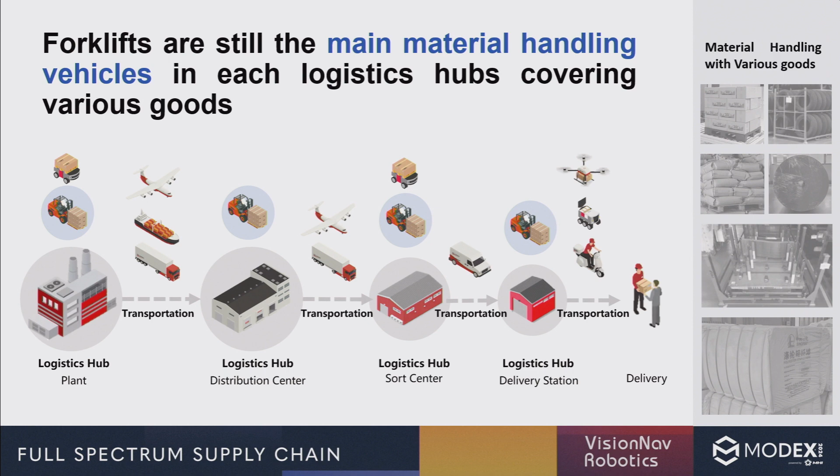But we're slowly realizing that's not the most efficient way to do such. So by show of hands, who's in this room right now because of labor shortages? What about maybe product damage? Safety? Okay, so there's a lot of different variables to start looking into outside of just the traditional reduction of pallet movements within the four walls of your facility, whether it's distribution, manufacturing, logistics, et cetera.

And slowly over time, we are all realizing now, if you look around this expo, for example, years ago you rarely saw a robot. Now it's like everywhere you go, you see automation here, robotics here. And that slowly has been happening over the course of the last 10 years or so at a much more rapid pace. There's always been traditional automation and AGV, especially in manufacturing, automotive facilities, but it's been gradually increasing over time.

Through several mediums, because of labor shortages or trying to be more competitive in your application or finding a better way. But we predict here at VisionNav Robotics that within the next 20 years or so it's going to be almost a third of global annual sales of material handling solutions. Right now in 2023, AGVs are only roughly 1% of the global forklift market, but we're predicting by 2028, almost 20% or more.

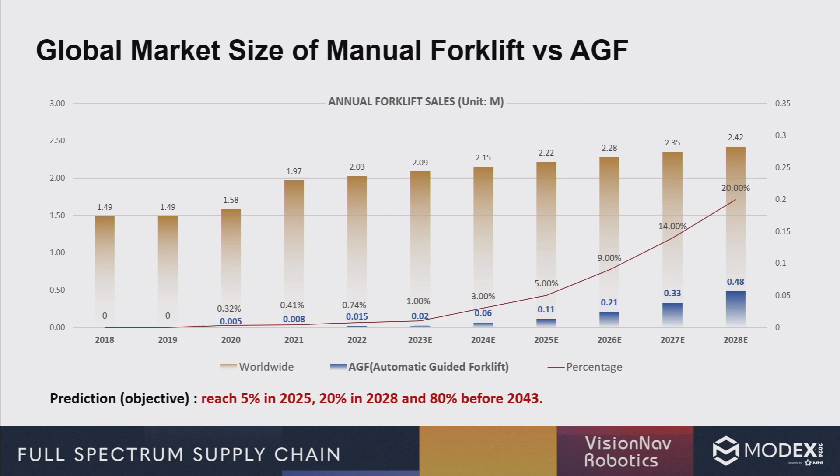And that's the reason why you guys are here right now. You're already thinking, what's next here in this space. And that's really to start automating your fleet and thinking about ways to maximize efficiency within the four walls of your facility.

So key components of AGVs - they are chassis forklifts. Almost every manufacturer here in the show uses a chassis forklift. It looks very similar to the forklifts you have here in your facility, but there's several different components of the unit. Most of the time they're off-the-shelf components: SICK safety sensors, 2D LiDARs, 3D LiDARs through RoboSense or Ouster. They're all off-the-shelf components and different controllers that drive the vehicle.

Starting off with positioning, a lot of questions come about how do AGVs work? How does it get from point A to point B? Most organizations are using - does anyone know what LiDAR is? Light detection and ranging, or the SLAM algorithm that controls the perception. So 3D laser LiDAR, maybe different image cameras or inertial controllers for steering and driving encoders - different components to help navigate in the real world once it's deployed.

So that's from a positioning standpoint. And then you have the controller that actually drives the drive motor, the lifting motor, the steering encoders on the vehicle. Again, off-the-shelf components that anyone can outsource and utilize.

And then you have the perception. Here at VisionNav Robotics, we use a higher level of perception. So we do trailer loading, high bay put away using 3D LiDAR perception and machine learning algorithms to perceive different payloads and racks. That's another outlook to utilize on a traditional AGV forklift. And then safety - everyone has a safety director that's always constantly saying, I don't think we can automate this yet because how safe is it.

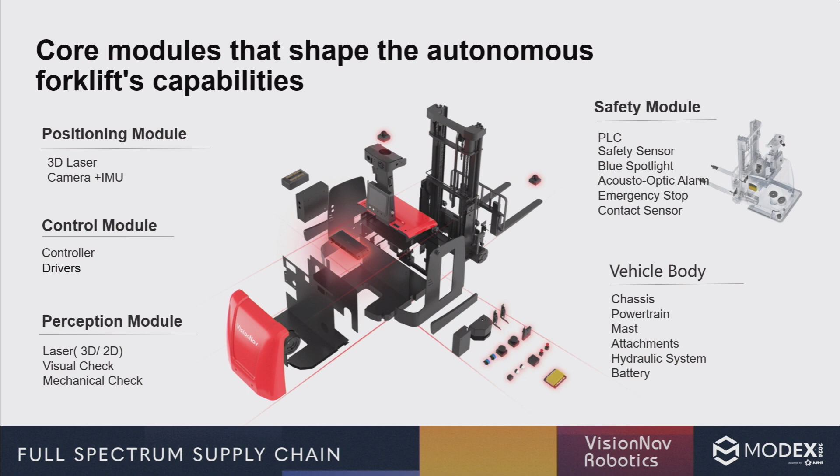A lot of them are using different safety features like PLCs through SICK that are PLD or PLE safety rated, 2D plane LiDAR, 360 coverage around the vehicle. You want to make sure your provider is utilizing ANSI B56.5 as a safety standard here in North America, or if there's a global expansion, ISO standards and CE standards. You want to make sure all those components have some type of safety logic and standards associated to the devices. Again, off-the-shelf devices that many players here at this expo today use.

And then obviously earlier I talked about the chassis itself. Most are just standard forklift chassis, retrofitted essentially to make it autonomous. Now, given a lot of organizations utilize their own proprietary software to drive the vehicle, that's where some organizations will start separating themselves as far as perception and doing really complex scenarios within the four walls of your facility.

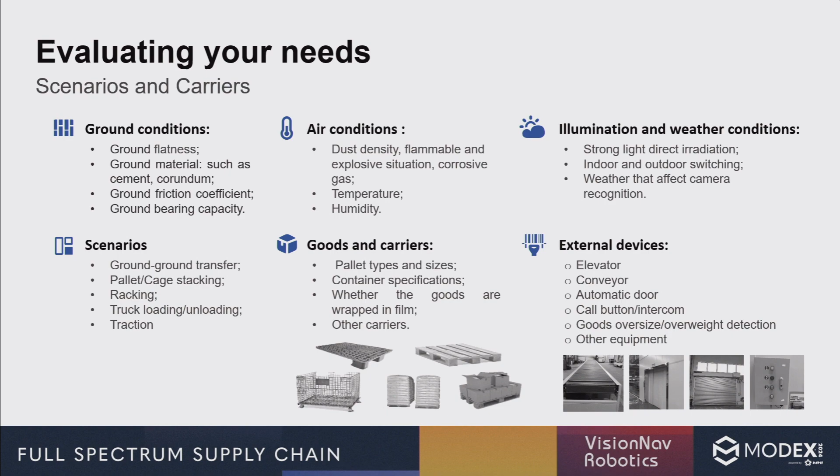So how do you look into automation? How do you evaluate your application? So do we have any 3PLs in here? How about some general manufacturing? And hopefully no foundries. Any foundries in here, or like concrete factories or anything like that? No? Okay, so those three applications are extremely different.

3PLs are mostly clean. There might be some pallet boards and some shrink and stretch wrap on the ground. Manufacturing could be dusty, a little bit of grime here and there. And then foundry is just, that's a different world.

So how do you evaluate the application? Perception and navigation is extremely important to the environment that the AGV system is in. You want to understand the ground flatness. You want to look into the environment, humidity, temperatures also will affect perception and navigation.

No different than everyone wearing glasses right now like I am. If I get a lot of dust and debris on there, I'm going to wipe them off. So understanding the environment that the AGV is going to be implemented into, and the lighting and things of that nature, is extremely important, and that's something you should focus on as well for higher accuracy.

Of picking and transportation. And lastly, when it comes to AGVs in your facility, integrating into infrastructure - you guys may use conveyor systems, ASRSs, machine PLC logic. Hopefully the majority of AGV providers have the ability to integrate to your facility infrastructure using those type of logics.

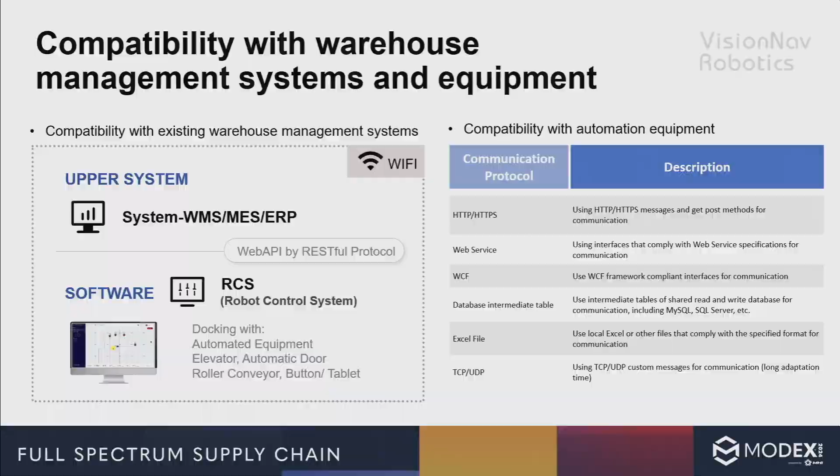Now, if you're in more of a 3PL, maybe a warehousing atmosphere, you need some inventory tracking. So does AGVs tie up to your upper system? Yes, they do. They have the ability to tie into your WMS, whether it's a homegrown system or maybe a SAP, Manhattan, Blue Yonder. Majority of organizations have Wi-Fi connectivity, open API, Modbus protocol, for example, to tie up and message into your inventory for tracking as well. Even barcode scanning.

So if you guys have barcode scanning logic that's manually triggered at the QC area, that's another opportunity to utilize AGVs for triggering and mission demand. And then how that works is, your WMS is the upper system, the brain, so to speak. The AGV provider's fleet management system - here at VisionNav, we call it the RCS, Robot Control System - that's our mid-level system that controls the activities inputted from your upper system. It translates down through the body of the AGVs, telling the AGV to go to X location to pick, or stage a pallet at dock door 4, for example.

Service and support, it's extremely important too as well. What happens after the company sells you a product or a solution? You don't want them to just walk away and say, hey, good luck, Mr. Customer, I'll see you in 5 or 6 years. That's not good practice at all.

So you want to make sure the organization has a good structure of support, of integrators, general manuals, integration protocol, project engineers and deployment team members to help assist and walk you through that go live date. And then most importantly, supporting you after the go live date - whether it's 2 weeks, 30, 60 days on site, and then continuously meeting with you on a bi-weekly, monthly practice for KPIs, continuous training, and things of that nature.

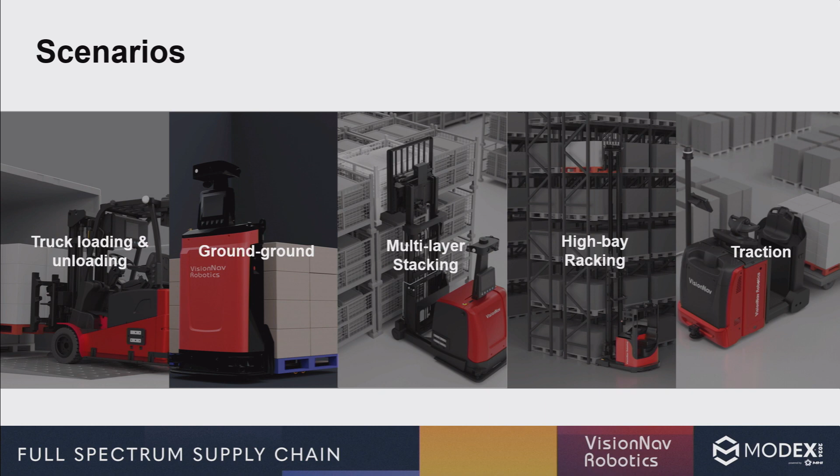Some scenarios we utilize right now are trailer loading and unloading, ground to ground, high bay put away, stacking and destacking especially in bulk, so 3PLs or warehousing up to 3 or 4 pallets high potentially, and then traction, which is tugger, long milk runs, plant to warehouse, those type of scenarios.

So here I'm just going to dive into some of our projects that we deployed over the last several years, and maybe it'll get some of your brains going regarding what's out there and opportunity.

The sound's off, but this is an opportunity we deployed about 2 years ago with Coupang. If you guys know who Coupang is, they're in South Korea, they're like the Amazon over in Korea. We deployed 56 of our units in their one facility, doing ground-to-ground A to B movements across conveyance and elevators.

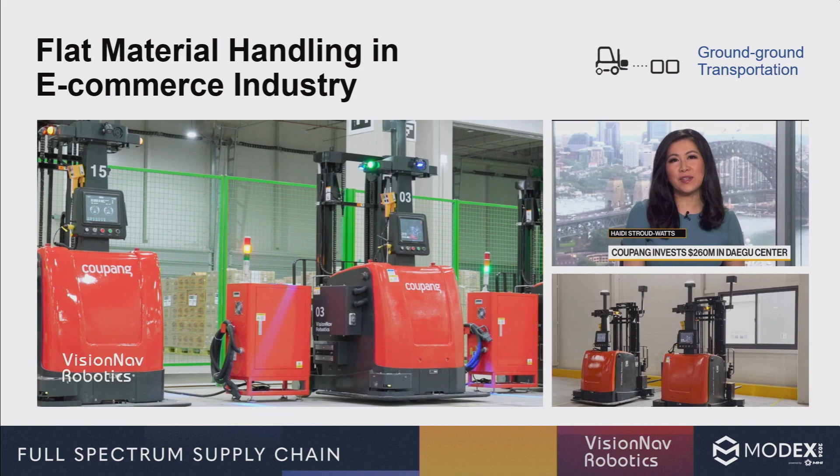Bloomberg actually did a really great interview on this project for us last year, so that was a really good opportunity for exposure. So again, the e-commerce, the 3PLs, right?

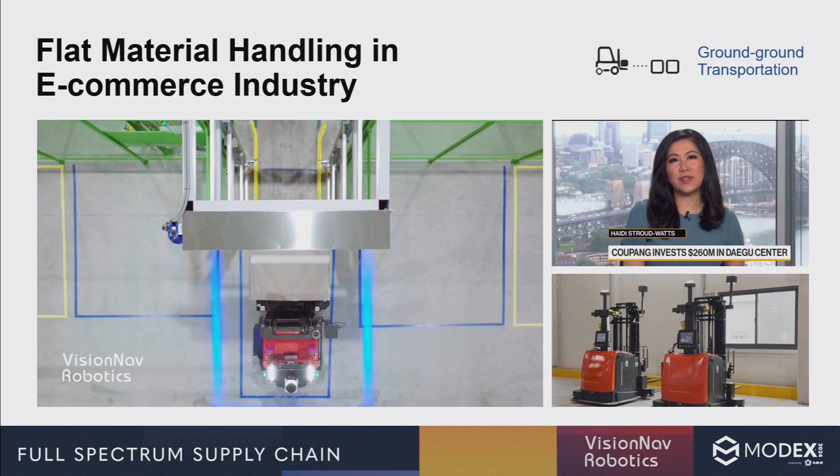Your biggest bang for your buck is going to be the non-value labor from point A to point B. That's maybe QC inbound to staging, to end caps, and then having the high bay manual operators as a phased approach continue to do that movement.

Because typically in most facilities, high bay reach truck operators, tow truck operators are the highest cost and paid. It's a very skilled task to do. I've been in this space for almost 12 years and I would never dare get on a reach truck, right? So thinking about where the low-hanging fruit is to automate, especially in 3PL long facilities, is that A to B, ground to ground.

Now, when it comes to automotive, we have the ability - oh, my clicker's not working. Here in this bottom screen, you'll see the one video working of our automotive cage stacking.

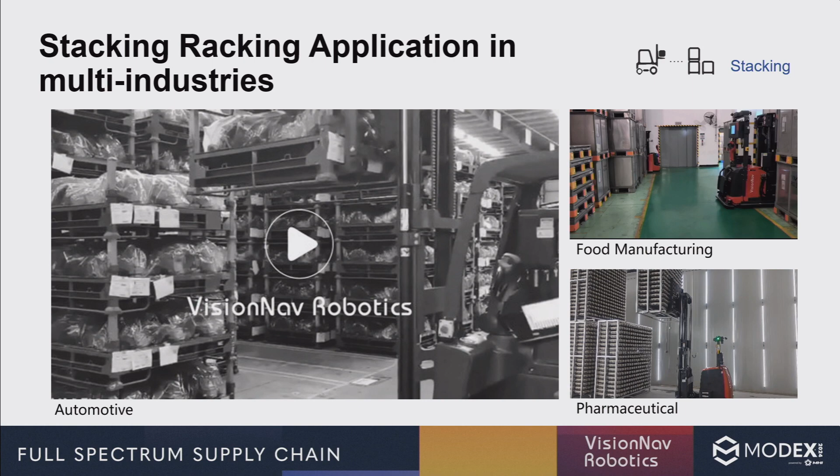So here at VisionNav Robotics, we have the ability not only to handle GMA CHEP pallets, PECO pallets, but also to handle automotive cages and racks and really unique payloads and rack systems. So we use our machine learning image cameras to understand the 4 posts and then stack on top of each other at height in bulk or into a high bay put away scenario as well.

So the automotive scenario, I know that's huge, WIP, bringing racks to full body assembly lines, plant to warehouse. Those are great opportunities to automate your facility.

Here's another high bay put away. This is actually a Tesla 3PL facility where we're moving bumpers and sideboard panels 36 feet high with our VNR reach truck. So again, another opportunity to maximize your ROI with a high skilled move.

This is a move that, as I mentioned earlier, I wouldn't want to touch, but we had the ability here at VisionNav Robotics to do the high bay put away into single selective racking.

And I'll let this video play out a little bit. We can operate within a 10.5 foot aisle here at VisionNav Robotics.

And again, as you see on the screen, it's a traditional forklift, right? It just has these safety sensors, the visual, the software learning to facilitate it. So these type of systems don't look very scary. Some AGV AMRs don't look like forklifts, people might step away and be like, hey, this looks kind of concerning. Our systems are really operator friendly.

They even have the ability to be manually triggered as well. So you can use the HMI screen, transfer over to manual with a password and key protected, and then drive it as a manual reach truck, forklift, pallet jack, etc.

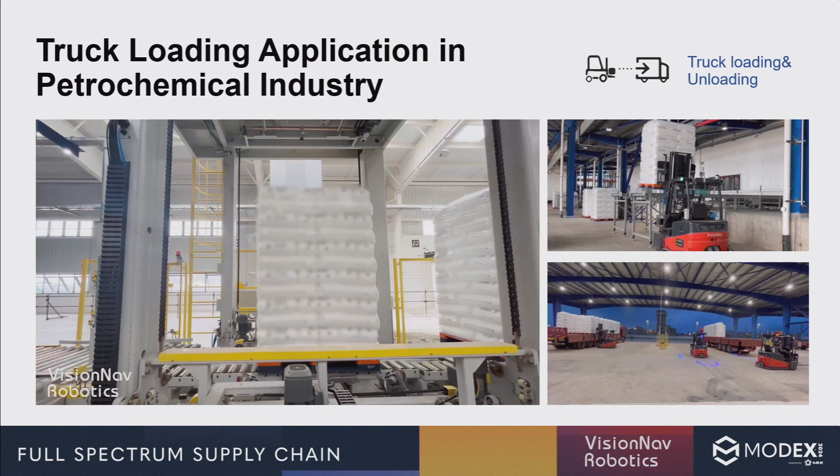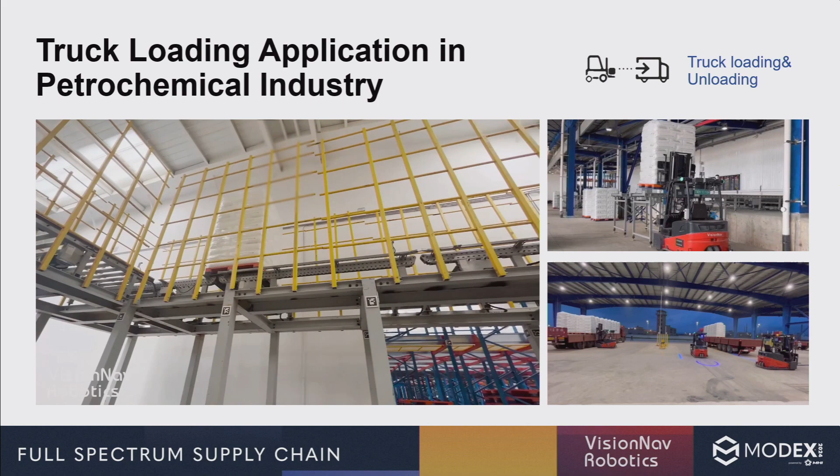And then I mentioned earlier, we have the ability to do trailer loading and unloading with our sit-down counterbalance. So if you go to our booth, C4075, you won't see this model - you'll see our new model, VNST20, doing trailer loading, but it's an autonomous pallet jack. So smaller form factor, lower cost, less weight on the floor, capacity of a trailer.

So this is some petrochemical facility overseas where we're using our VNE20 to do side loading. So outdoor covered area doing wing truck, flatbed, side loading and unloading from conveyance here at VisionNav Robotics.

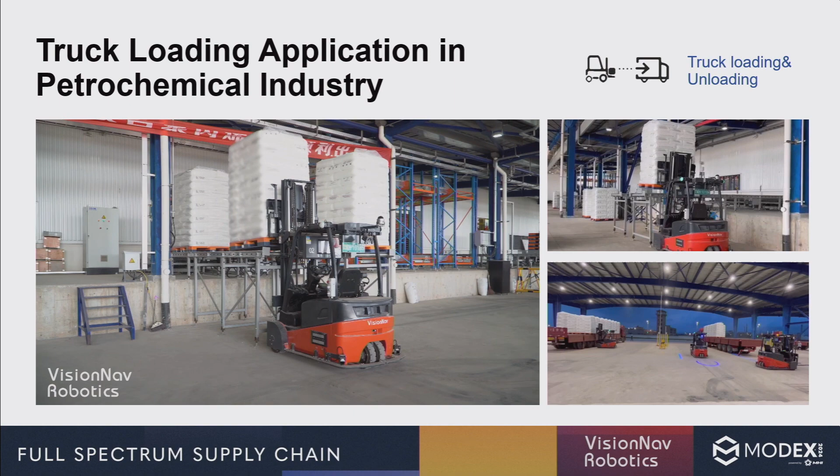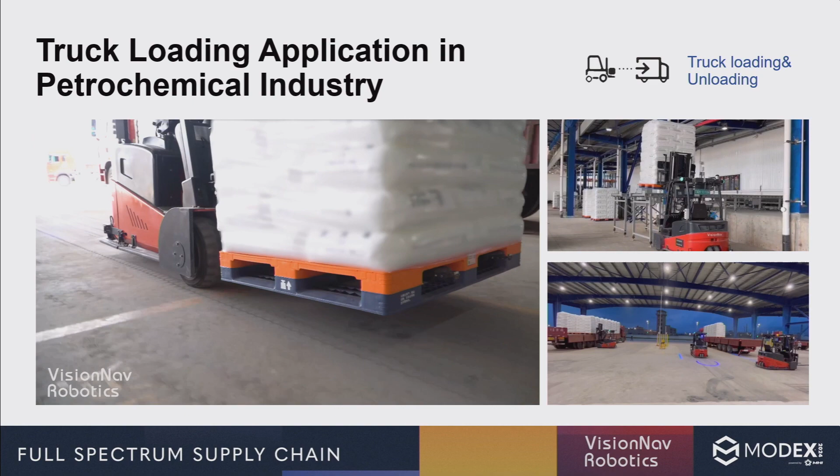So another opportunity, right? I'm sure everyone has 53-foot trailers and dock doors, either using PECO or CHEP pallets. We have the ability to do that trailer loading scenario for you guys this year, with unloading coming in 2025.

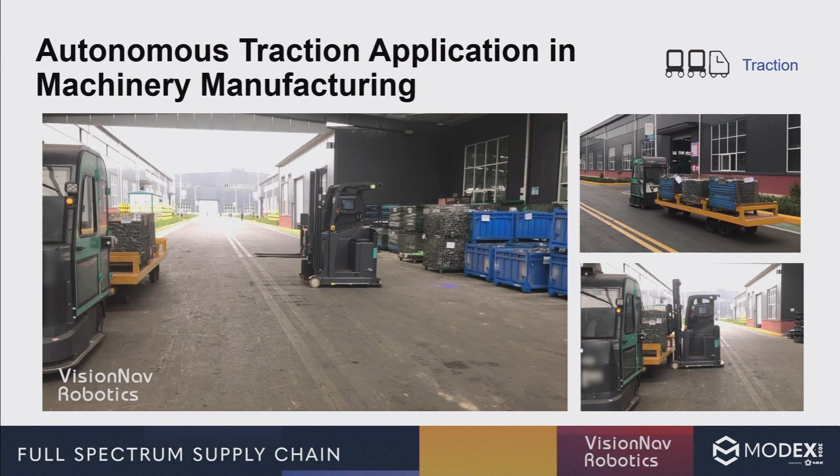Thinking about plant-to-warehouse traction scenarios, here's our solution deployed using a heterogeneous fleet. We have a full product line: pallet jacks, forklifts, tuggers, things of that nature, but they all work on the same deployed map. So we can do handoffs. You can imagine an autonomous forklift loading an autonomous tugger, sending a handshake, then sending that tugger off. Or having a pallet jack load next to a forklift to do high bay put-away, to eliminate or reduce that entire process from A to B, and then high bay.

So you really want to look for opportunities to increase productivity and efficiency. On average, we're averaging around 20 to 30% improvements in cost across all of our use cases deployed across our 450 projects. We have over 3,000 deployed globally here at VisionNav Robotics. And from medium-sized to large-sized projects, we're averaging anywhere from 2 to 3 months deployment.

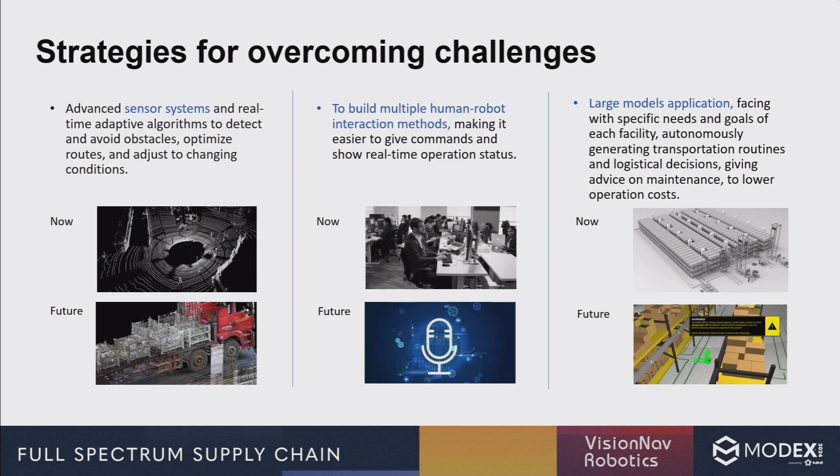And then also large modeling applications—what that applies to is just how do we deploy AGVs at a lower cost and at a quicker scale. I think right now a lot of people get hung up on, hey, AGVs cost a lot of money, almost like how flat screens were back when I was a little kid. Flat screens used to be thousands of dollars. Now Target's giving them away for free every Black Friday. So I think AGVs are slowly getting into that phase of lowering costs and making it more scalable.